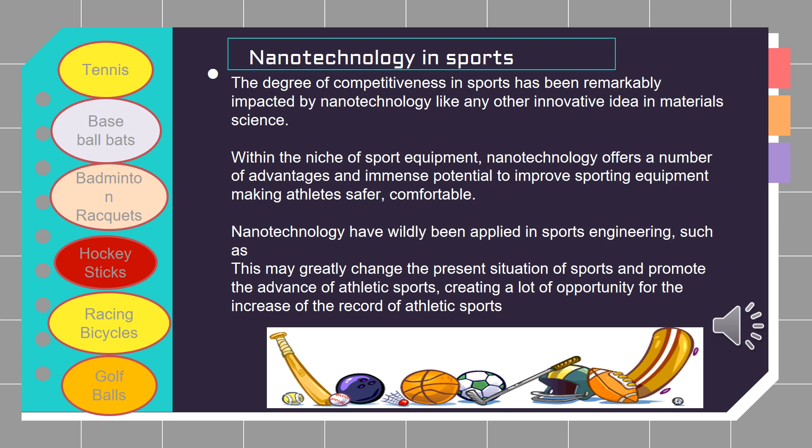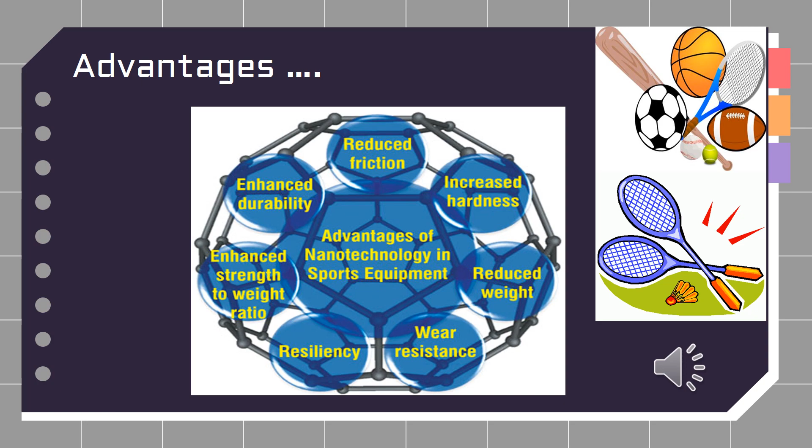So the question arises: why are we using nanotechnology in sports equipment? It's because it offers a number of advantages, like reducing friction, enhancing durability, enhancing strength-to-weight ratio, improving resiliency and wear resistance, reducing weight to make sports equipment lighter, and increasing hardness. Therefore, we are using nanomaterials in sports equipment.

Let's discuss the game of tennis. The game of tennis is a prime example of how nanotechnology is having an interesting impact on sports equipment. According to present research, equipment producer Wilson has been able to create tennis rackets that are twice as stable as conventional rackets and up to 22% more powerful.

This increase in the racket's performance capabilities can lead to big speed increases in what is already an extremely fast-paced game. In addition to racket research, Wilson is also conducting research to find innovative ways to improve the tennis balls used today.

This research has allowed them to design balls that hold their bounce much longer than is seen in balls currently available in the market. This is accomplished by bonding microscopic balls of butyl rubber, a polymer, with clay particles.

This mixture is then applied to the inner layer of the balls, creating an airtight but still flexible boundary that keeps the gas inside the tennis ball much longer.

Here is the visual explanation of how the airtight boundary is formed, shown in the figure: the ordinary tennis ball versus the tennis ball with the nanocomposite gas barrier. Due to this, the gas in the ball remains for much longer, through layering of the nanocomposite—the butyl rubber bonded with clay particles.

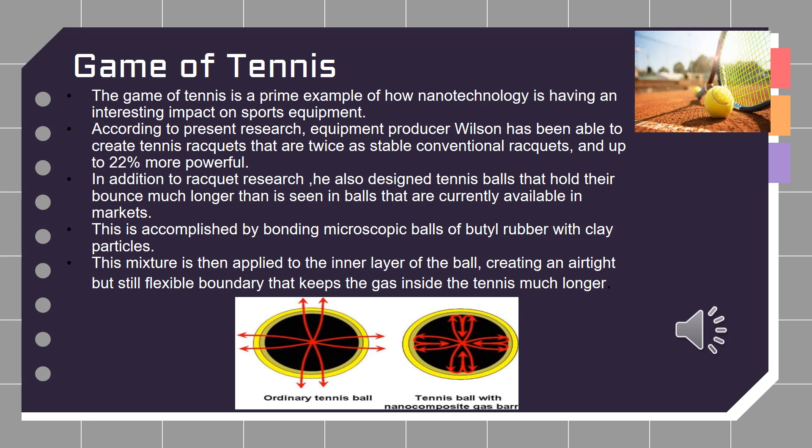Now moving to the sport of golf. Nanomaterials like carbon nanotubes, fullerene, silica nanoparticles, nanoclays, carbon nanofibers, and nanonickel are used in golf equipment to invoke benefits like potency, repulsion power, enlarged stiffness, and reduced weight.

The sport of golf is also impacted by nanotechnology in a similar way as tennis. Breakthroughs in the production of lighter yet stronger composite materials have greatly impacted the design of clubs. For example, Wilson is using a nanocomposite to replace the titanium crown used on its current golf clubs.

The result of this is that it lowers the weight and center of gravity of the clubs and increases the power and accuracy potential of the club. In addition, the stronger material used to produce the shafts on golf clubs renders them more reliable and increases their service life.

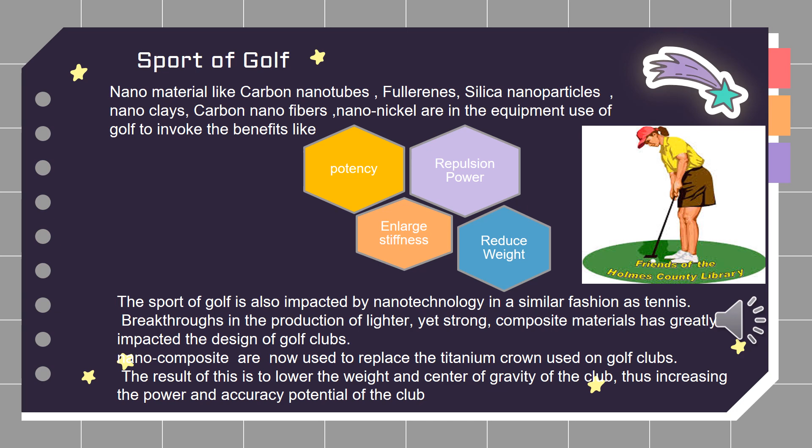Golf balls have also reaped the benefits of advances in nanotechnology. The ability to control the production of material on the molecular level has enabled companies to develop a ball that does not suffer from uneven spin, allowing the ball to fly along a much straighter path.

One of the biggest and most universal problems in the sports world is smelly gym clothes and sports equipment. Sports equipment is traditionally one of the best breeding grounds for bacteria and fungi that cause infections, odor, itchiness, sores, and smelly feet.

Nanoparticles are developed that can mesh with cotton, plastic, and nylon material in shoes, pads, jerseys, helmets, socks, or other pieces of sports equipment. This is accomplished by making nanosilver particles that typically measure around 25 nanometers.

Nanosilver particles can suppress respiration and basal metabolism of the electron transfer system and transport of substrate in microbial cell membranes. This process inhibits the multiplication and growth of bacteria and fungi, leading to much cleaner and better smelling equipment.

Now let's discuss cycling. When it comes to professional cycling, every second counts toward victory. Changes have been made in the manufacturing of bicycles by introducing carbon nanotubes into the carbon fiber resin. Introduction of nanotechnology in sports equipment makes bicycles lighter and stronger, helping cyclists make a greater difference in cycling.

As a summary, carbon nanotubes are used in tennis, badminton and golf. The benefits are increased stiffness, consistency, resiliency and vibration control of the rackets, along with reduced weight and lower torque.

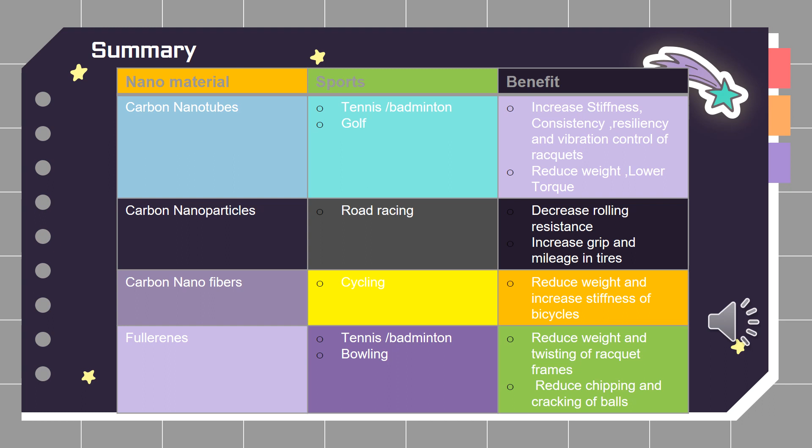Fullerenes are also used in tennis, badminton and bowling. They reduce the weight and twisting of racket frames, and reduce the chipping and cracking of the balls.

Nanoclays are used in watercraft and tennis. In watercraft, they reduce weight and enhance the speed of water boats, and in tennis, they increase the bounce of the ball.

Nanonickel is used in golf, increasing the moment of inertia and stability of the clubs. Nanotitanium is used in badminton, transmitting more power to the shuttlecock or ball for more accurate shots.

Now, Nimra Sajid will discuss further applications of nanotechnology in the automobile industry.

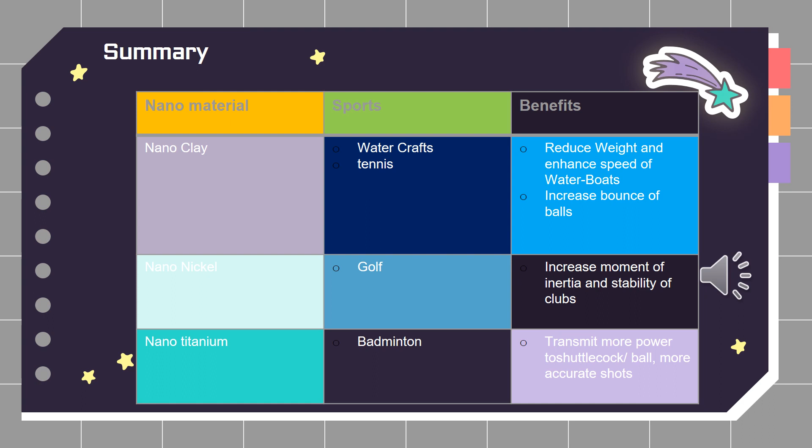This is Nimra Sajid, and I am going to discuss the applications of nanotechnology in the automobile industry. First, what is the use of nanotechnology in automobile industries? It ensures the production of body parts that are lighter in weight and also very strong. It also ensures less fuel consumption, enhances the safety of automobiles, and gives better performance of cars over a longer period.

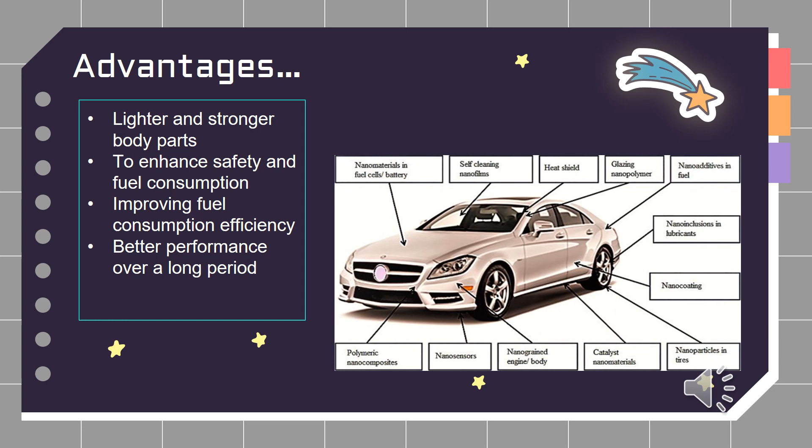First is the use of nanotechnology to produce lightweight automobile body parts. Carbon nanotubes and nanomaterials like titanium dioxide, magnesium, silicon, and nanocomposites have light weight, so their application in automobile body parts reduces weight and also increases strength.

As carbon nanotubes are used, it increases the strength, and as body weight decreases, it ensures less fuel consumption. Another advantage is that multifunctional coatings are used to recast the steel at high temperature.

So what is the use of steel? High strength steel is used to increase the strength of the body parts, and it is difficult to recast the steel in cold conditions. That's why this steel must be heated at high temperature in order to recast it.

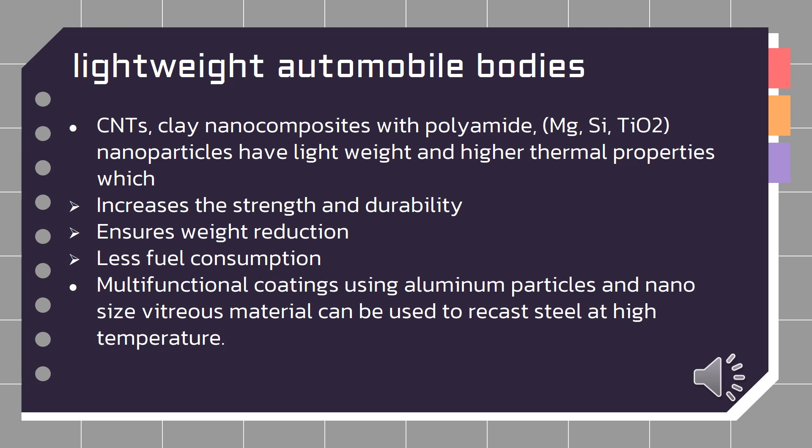Multifunctional coatings, made up of aluminum particles and nano-size vitreous materials, enhance this recasting process. Another advantage of nanotechnology is the production of safe mirrors and windows.

During the daytime sunlight, and at night the light of other automobiles, produces a glare on the glasses and mirrors of automobiles. So these mirrors are coated with aluminum oxide layers with a thickness below 100 nanometers.

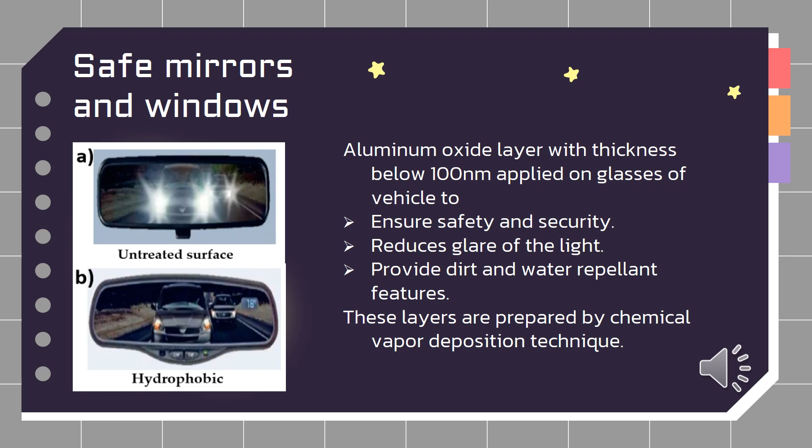These coatings are applied through a process of chemical vapor deposition. This not only reduces the glare of light but also ensures safety and security, and provides the mirror with hydrophobic properties. Next are nanomaterial-based tires.

The performance of a tire depends on the rubber composition of the tire. If we add nanoparticles into the rubber composite of the tire, it increases the tire's durability. The addition of nano aluminum trioxide enhances the wear resistance of the tire, and a study reported that nano alumina with carbon black improves wear resistance by up to 800%.

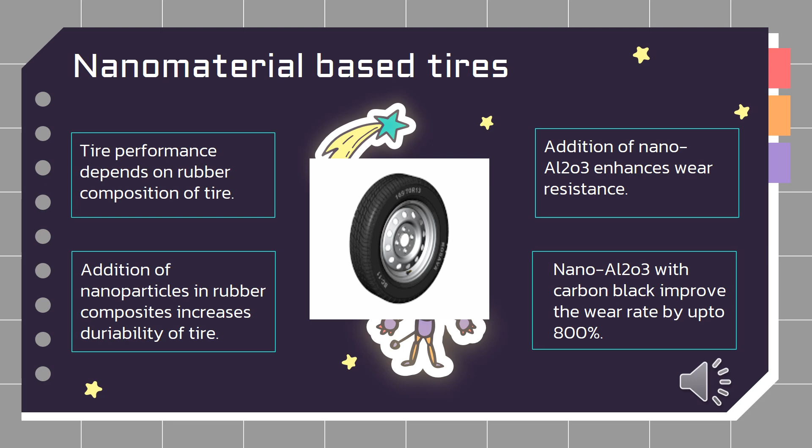Next are nano-based coatings. Coatings are materials that protect the surface and body of a car. If we add nanoparticles into the coatings to make nanoparticle-based coatings, it enhances protection and also gives scratch resistance to the automobile bodies.

It also protects the underneath layers from weather conditions. It decreases crack development by acting as a filler in the pores of the coating, and it also gives a self-healing ability to the coating. Examples include the addition of nano silica, titanium dioxide, aluminum trioxide, and zinc oxide nanoparticles as additives in the coating.

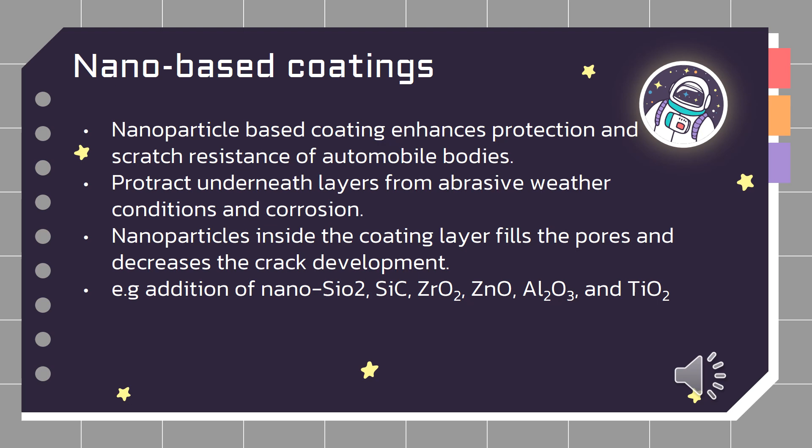This graph shows the wear resistance ability of modified versus unmodified epoxy polyurethane coating with a nanomaterial. The unmodified coating has low wear resistance compared to coatings modified with nano alumina and nano silica.

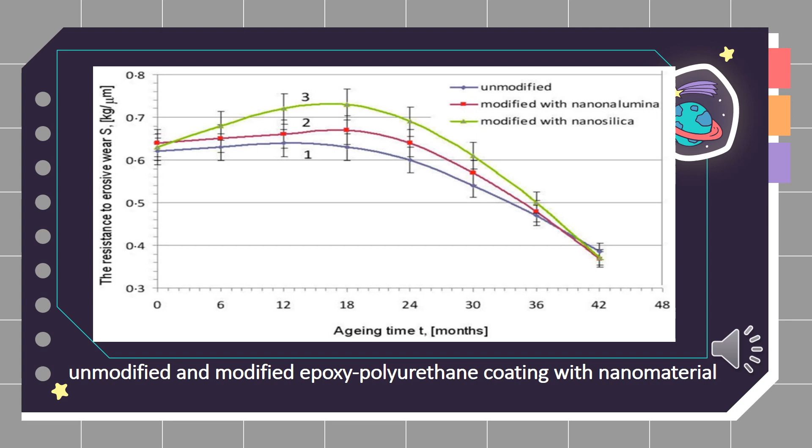As you can see from the graph, adding nanomaterials to the coating increases its wear resistance, protecting the body part from crack development and corrosion. Next is the application of nanotechnology for a more efficient engine.

The coating of aluminium nanoparticles will reduce the friction of the cylinder walls and increase the heat exchange efficiency of the engine. As we add silver nanoparticles in the diesel fuel, it will purify the diesel fuel and reduce the emission of toxic gases. Also, aluminium nanoparticles, when mixed with diesel fuel, reduce the smoke concentration.

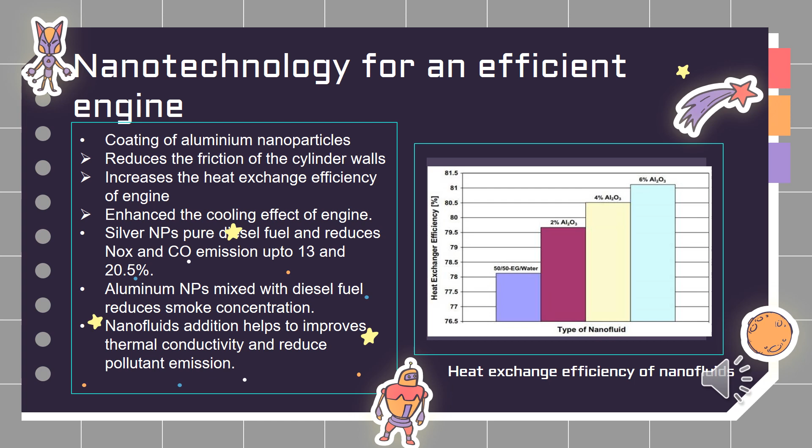The use of nanofluids increases the heat exchange ability of the engine. As this graph shows, as we increase the concentration of aluminum trioxide, which acts as a nanofluid, it increases the heat exchange efficiency of the engine.

The last application of nanotechnology is to provide a safer indoor vehicle environment. In order to create a healthier environment, eco-friendly nano agents are used, like gold and silver nanoparticles. These are used because they have antimicrobial properties.

In order to improve the interior air quality, filters are used which are covered with nanofibers, which improves the air quality inside the vehicle. Also, some nanomaterials have flame retardant agent properties. They act as flame retardant agents to reduce fire chances in case of an accident. For example, carbon nanotubes can be used as a filler in automobile fabrics as a flame retardant agent.

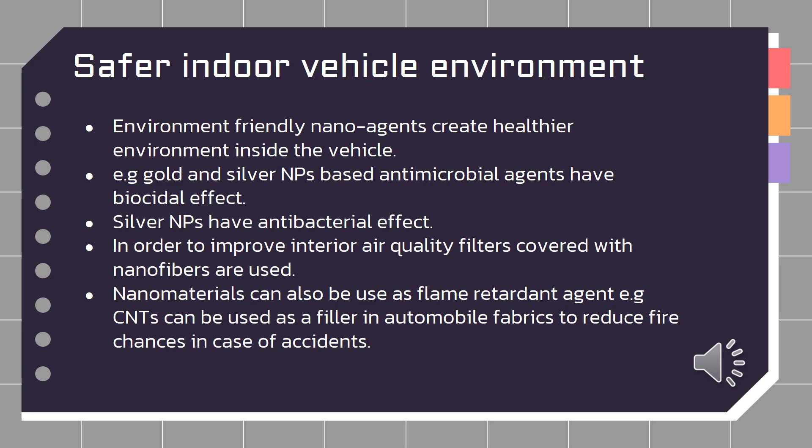Nanotechnology helps in making space flight more practical and could reduce the weight of a spacecraft by providing a lightweight skin and also maintaining and increasing structural strength. This helps in significantly reducing the amount of rocket fuel required, lowering the cost of reaching orbit and traveling in space. Similarly, nanotechnology can be used in a wide range of space industry including satellites, nanosensors, propulsion systems, rocket fuel, and spacecraft.

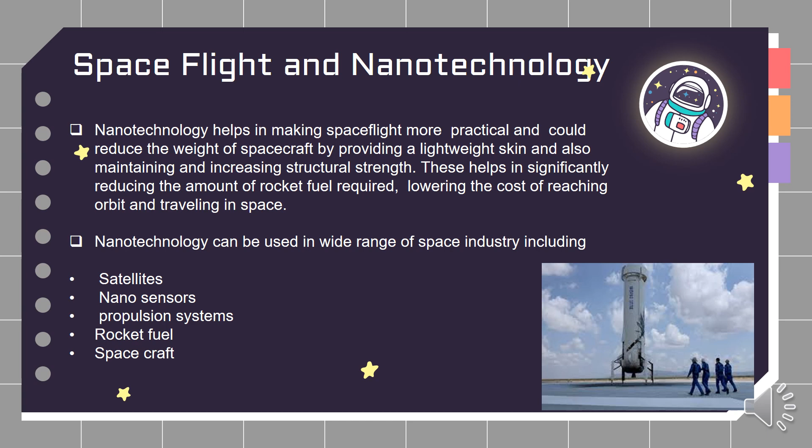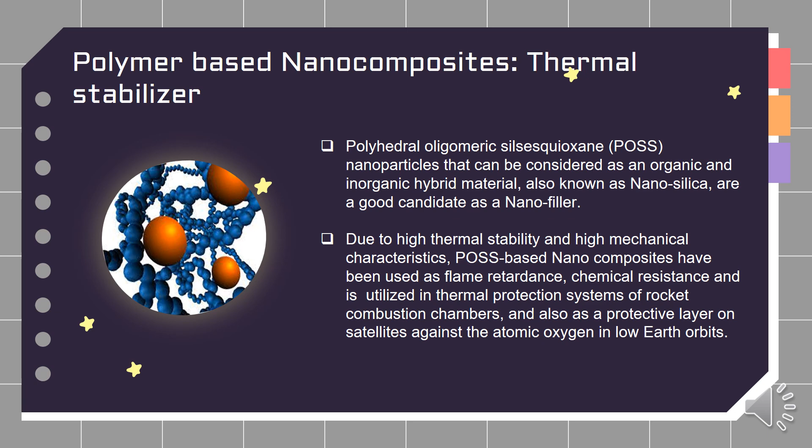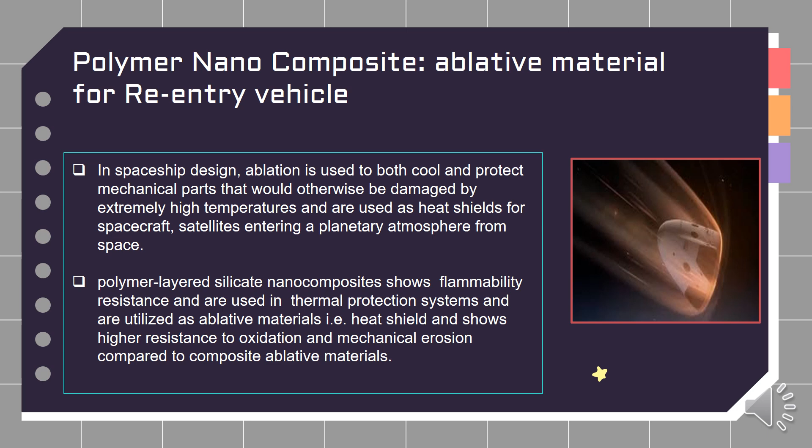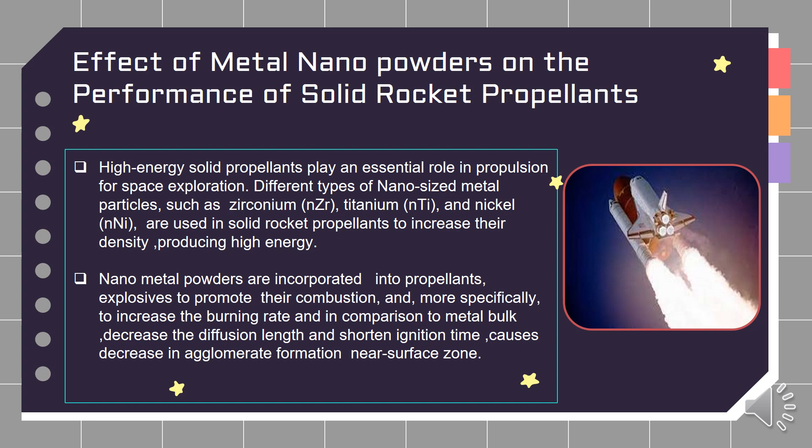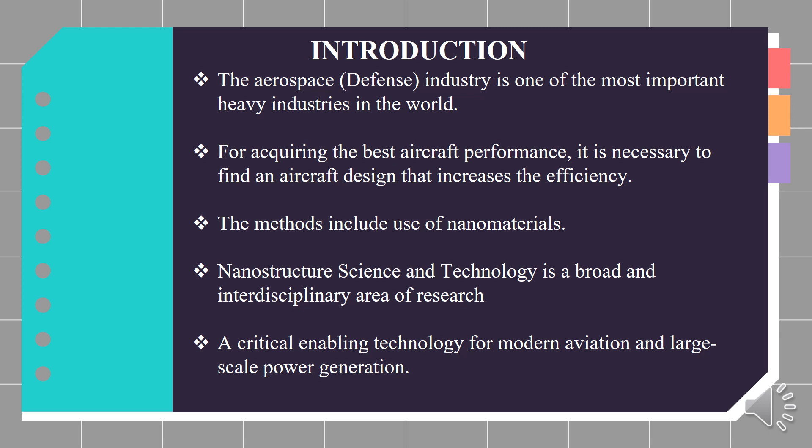The aerospace industry, which is also known as the defense industry, is one of the most important heavy industries in the world. For acquiring the best aircraft performance, it is necessary to find an aircraft design that increases efficiency. This method includes the use of nanomaterials. Nanostructure science and technology is a broad and interdisciplinary area of research. It is also a critical enabling technology for modern aviation and large-scale power generation processes.

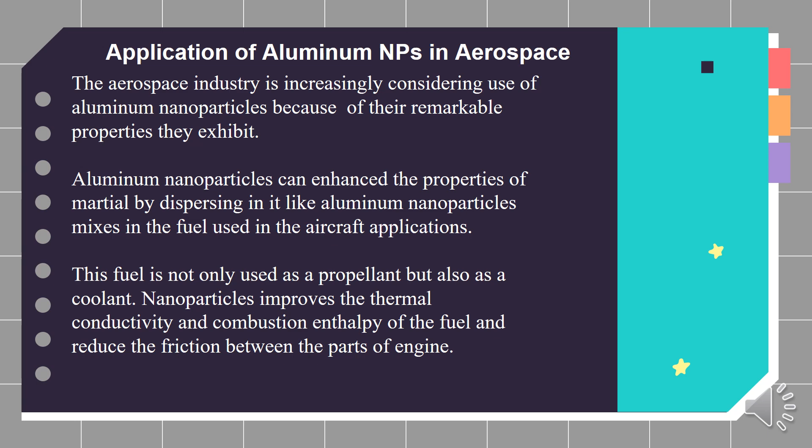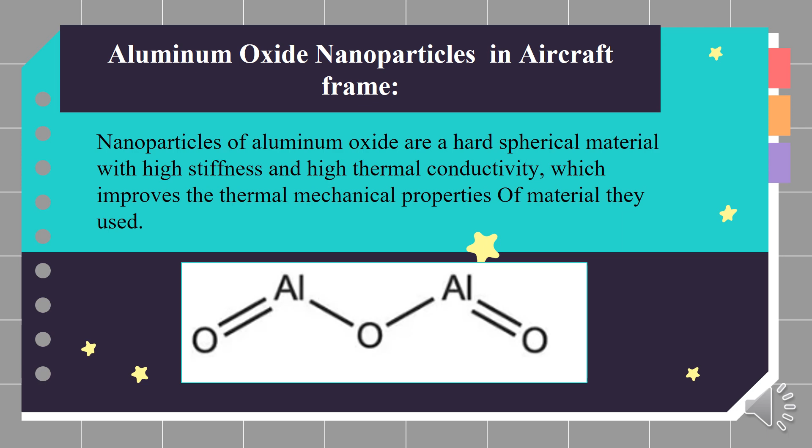Aluminum nanoparticles have thermal and electric conductivities, about 60% of copper, which accounts for its development as a conductor in the form of bars and tubes, which are used in numerous electrical applications in aircraft.

It reacts with oxygen in the air to form an extremely thin layer of oxide, which provides excellent corrosion protection properties. This layer has the ability of self-repairing in case of damage. Also, the anodizing process increases the thickness of the oxide layer and thus improves the strength of the natural corrosion protection process. Aluminum nanoparticles can be recycled indefinitely without losing any of their intrinsic qualities.

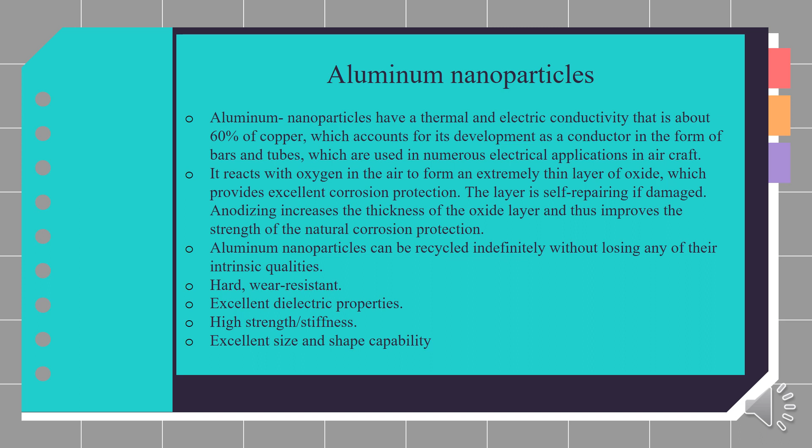They also have other applications, like they are hard and wear resistant. They show excellent dielectric properties. They have high strength and high stiffness, and they show excellent size and shape capability. Now I'm going to discuss applications of graphene nanoparticles in the aerospace industry.

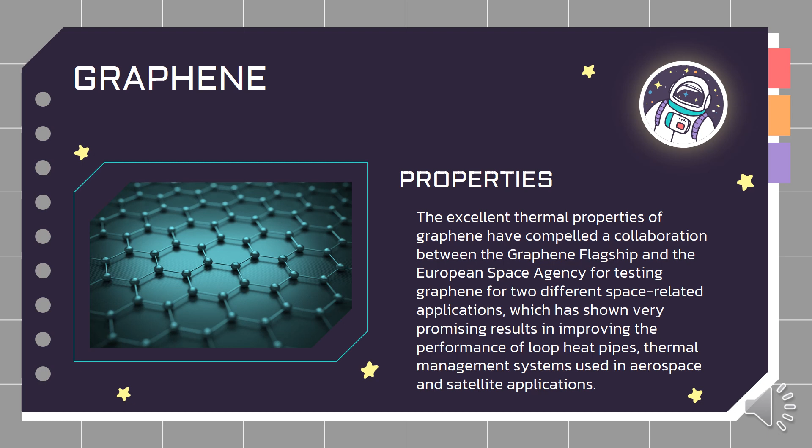The excellent thermal properties of graphene have compelled a collaboration between the Graphene Flagship and the European Space Agency for testing graphene for two different space-related applications, which has shown very promising results in improving the performance of loop heat pipes, thermal management systems used in aerospace and satellite applications.

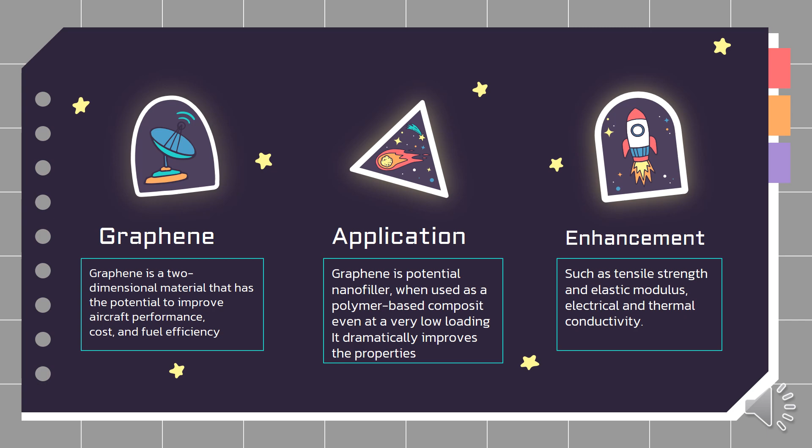Graphene is a two-dimensional material that has the potential to improve aircraft performance, cost, and fuel efficiency. Graphene is a potential nanofiller when used as a polymer based composite. Even at very low loading, it dramatically improves the properties of the material, such as tensile strength and elastic modulus, as well as electrical and thermal conductivity of the material which is used.

Ray Gibbs, who was the CEO of Haydale Technologies, mentioned that using graphene, they have developed electrically conductive epoxy resins, which can significantly increase the electrical conductivity of the carbon composite materials used in the defense industry in the construction of fuselages, to such a level that it would hopefully negate the use of copper mesh, which is employed for the prevention of damage caused from lightning strikes.

It's essential to have a good conductor. Copper mesh is currently used in the body of the aircraft.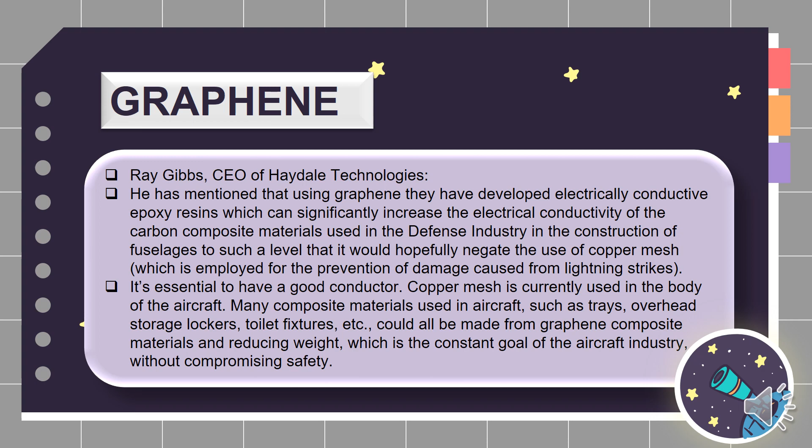Many composite materials used in aircraft, such as trays, overhead storage lockers, toilet fixtures, etc., could all be made from graphene composite materials, reducing weight, which is the constant goal of the aircraft industry, without compromising on safety. Last but not least, graphene polymer composites are being tried for various potential applications due to their outstanding properties. Graphene aerogel is basically a porous structure which can be used in the manufacture of aircraft, which will increase the specific fuel consumption, range, endurance, and performance of the aircraft.

Thank you. That's all from my side.

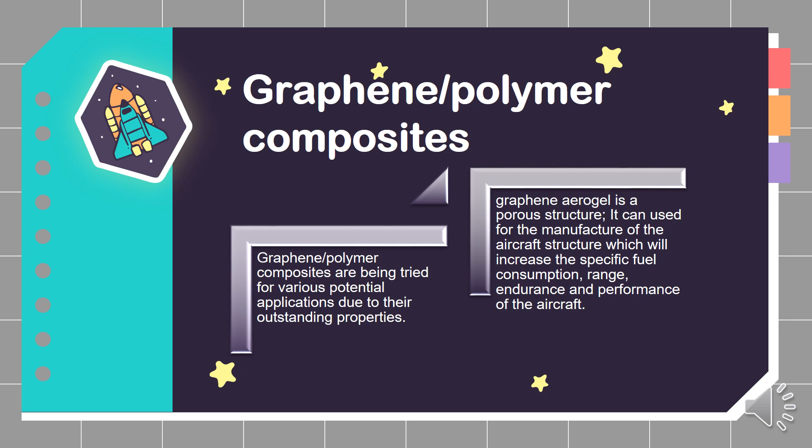Nanoparticles in aerospace engine parts, presented by Huria Absar.

Next is supercapacitors. Supercapacitors for airplanes are ceramic, barium titanate, and barium strontium titanate. They are nano-electromechanical systems used to develop standard fuel management units for fuel control in aero engines.

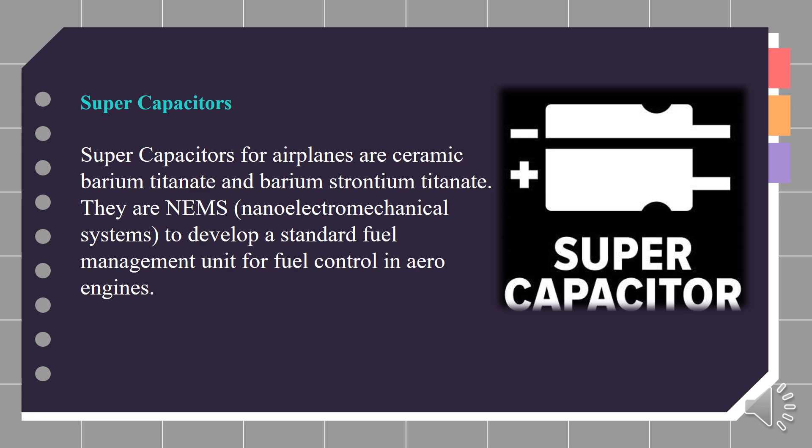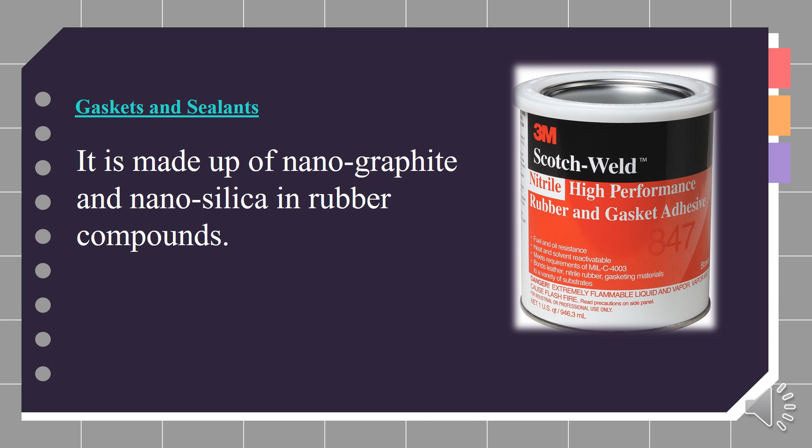Next is gasket and sealant. Gaskets are basically glues which are used to join different parts of the planes. It is made up of nanographite and nanosilica in rubber compounds, inhibiting corrosion of aerostructure. Nanochromium-based corrosion inhibitors are being developed to use in aircraft protection.

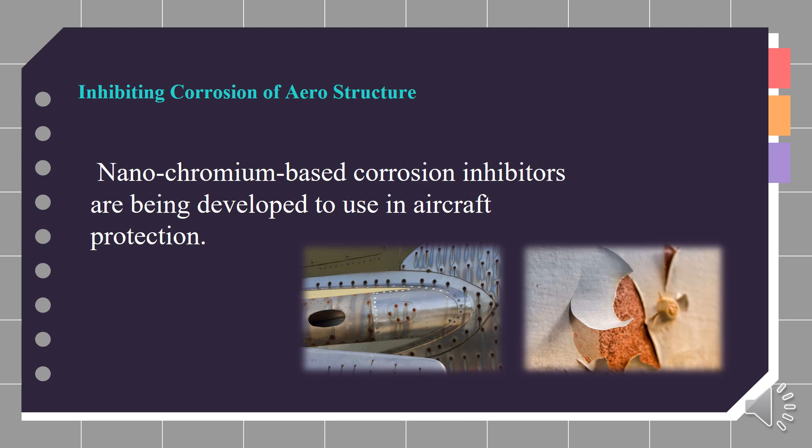Next is conductive plastics. These are used in various components of the aircraft where electrostatic discharge or electromagnetic interference shielding applications are required. They are powders of copper and iron.

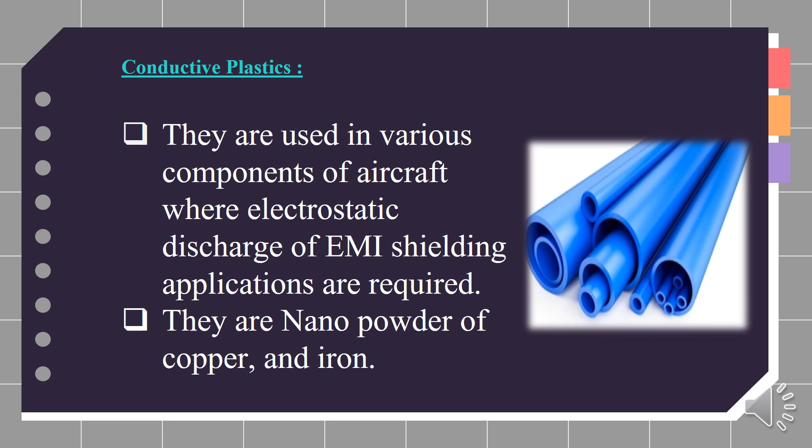Parachutes and aircraft arrester textiles are made up of nanofibers. Nanofiber polymers are utilized in making the parachutes and aircraft arrester textiles.

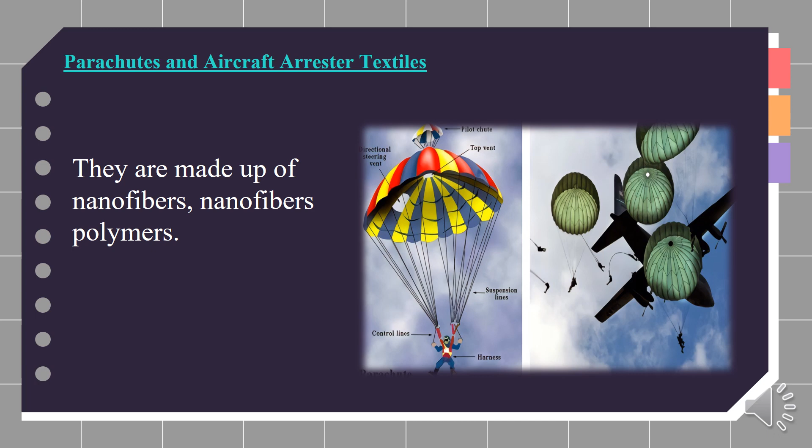Aircraft electrocommunication system. The need for miniaturization of the components and devices has taken center stage of research in the field of nanotechnology, especially the quantum effect of the wave-like behavior of electrons, which started to influence the design functionality of devices. Some have predicted that silicon technology is approaching its fundamental limits, hence miniaturizing the design for data storage units started with a demand to compress storage in smaller spaces while keeping the energy demand low. To meet these standards, nanotechnology has entered the area of miniaturized, faster and energy-saving communication systems.

Next is metal oxide particles. They play a very important role in data storage. Hard disks use superparamagnetic material for data recording, but there is a superparamagnetic limit where ambient thermal energy reverses the recorded magnetization. To combat this defect, exchange magnetic materials are being developed.

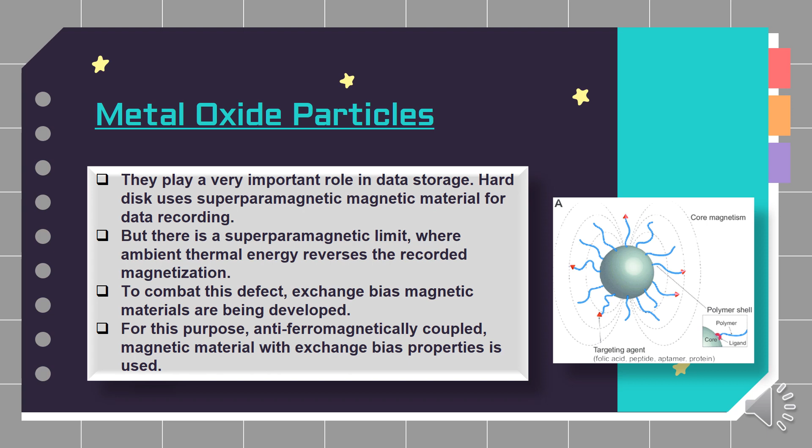For this purpose, anti-ferromagnetically coupled magnetic material with exchange bias properties is used. Thank you.